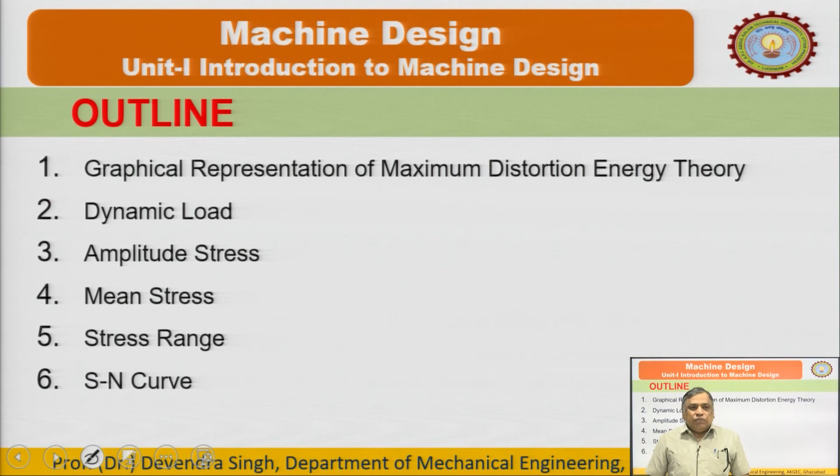Finally we will try to cover the determination of the endurance limit, because in static design we were considering the failure stress - for ductile material the yield point in tension, and for brittle material the ultimate tensile strength. Against dynamic load we consider a new strength called endurance limit or fatigue limit or fatigue strength. If these terms have additional meaning, we will discuss that when covering dynamic load design.

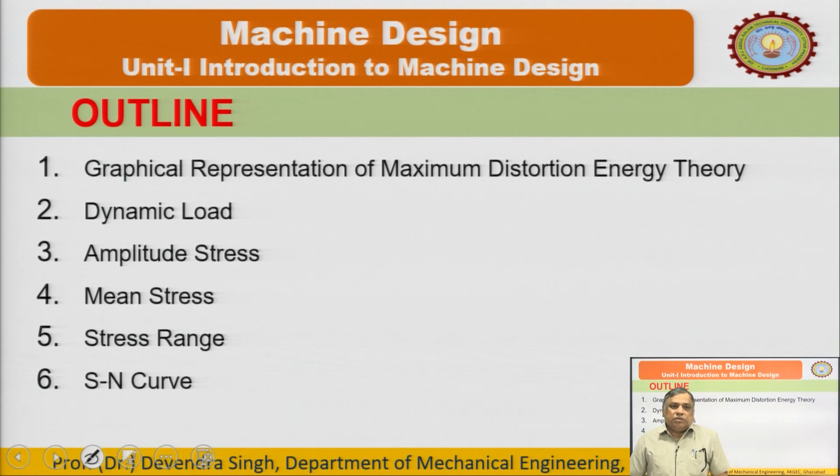So, the graphical representation of von Mises theory or the maximum distortion energy theory expression - this is the sigma 1 sigma 2 plane, O is the origin, and the expression for biaxial state of stress. This is the expression for factor of safety 1, and this is the equation of an ellipse.

So, to find where this ellipse intersects the sigma 1 axis and sigma 2 axis, we just put sigma 1 equals to 0 and sigma 2 equals to 0 in this equation. We can find out the points where it will intersect.

So if we want to find the points where this ellipse intersects the sigma 1 axis, we need to determine the coordinates of that point. So we just put the ordinate value 0, that is sigma 2 equals to 0, and find what sigma 1 is. Sigma 1 is equals to plus minus S_yt. As you put sigma 2 equals to 0, it becomes 0.

Sigma 2 equals to 0. Sigma 1 square should be less than or equal to S_yt square. So sigma 1 is plus minus S_yt. So the coordinates are S_yt and 0 - I haven't written the 0 here. So it intersects at S_yt, which is the yield point in tension.

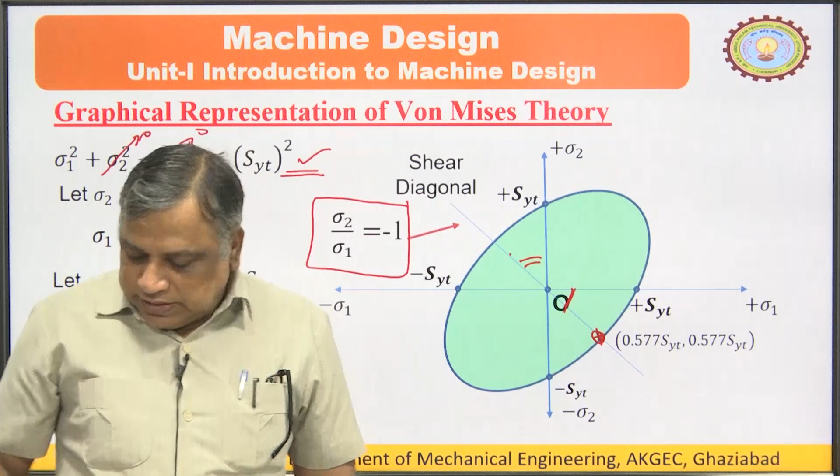This is the shear diagonal. So according to the maximum distortion theory, the shear stress at the yield point will be the maximum value, that is 0.577 times of SYT, and similarly we can determine it by the maximum shear stress theory. So this is the safe zone, and this was the yield point shear stress according to maximum distortion energy theory.

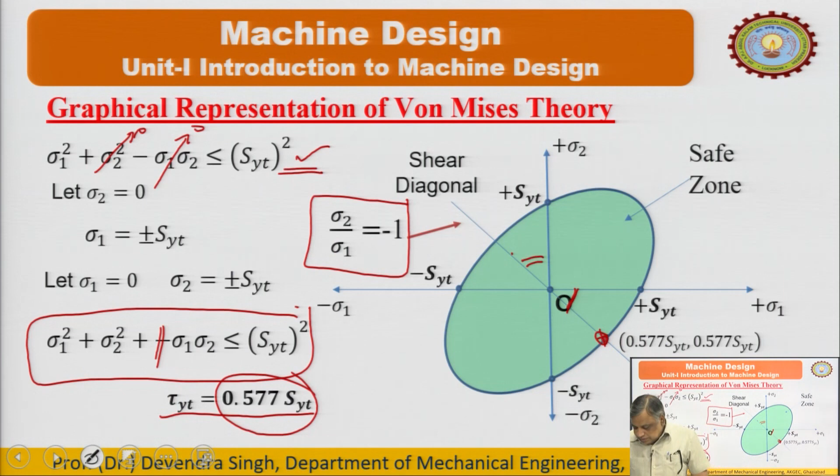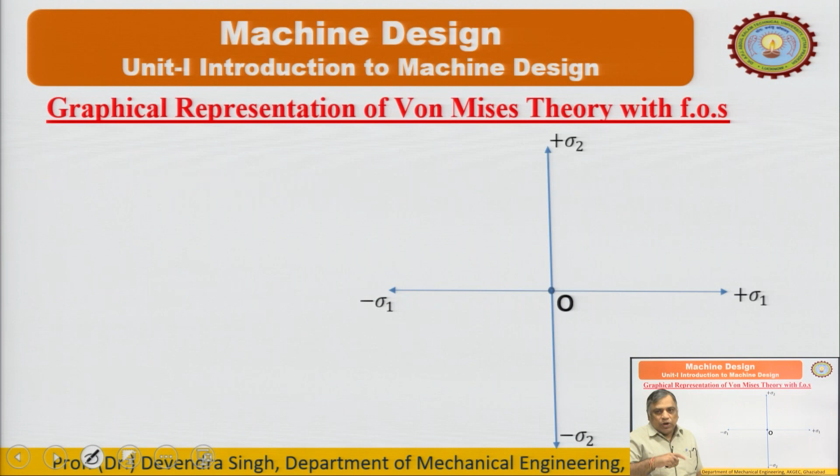Now, if we include some factor of safety, we will use SYT upon FOS on the right hand side, and the equation will change - this is the only change.

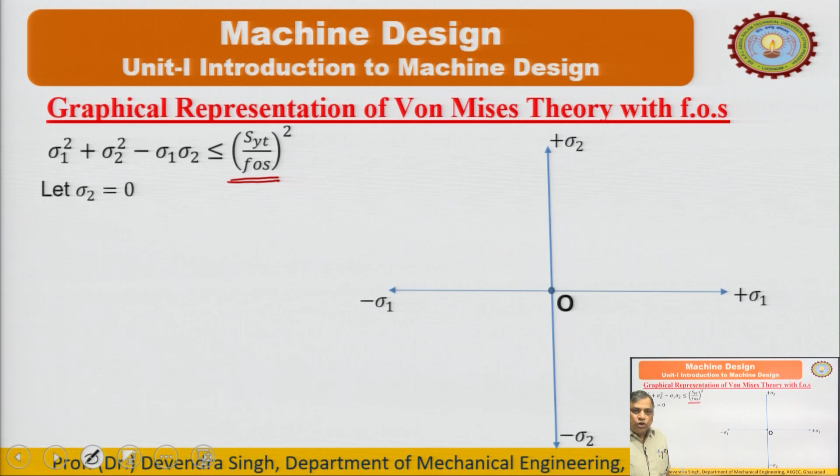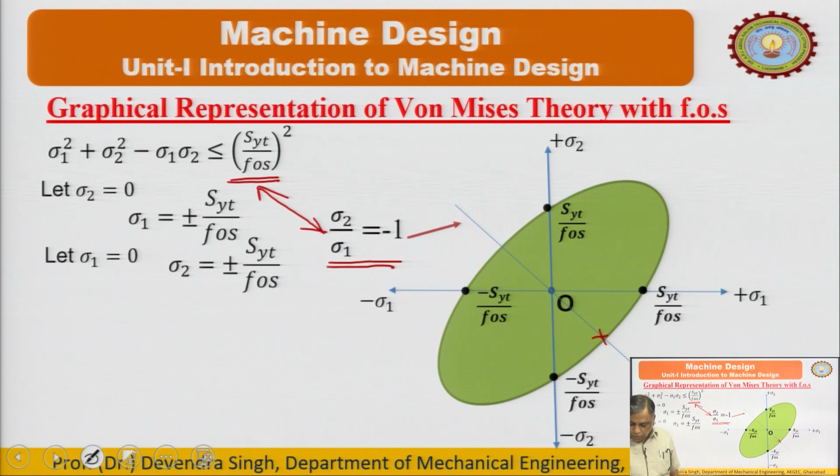Now again, sigma 1 and sigma 2 are the principal planes. This line represents the shear diagonal, and the equation of the shear diagonal is this. If we solve this and this, we get the value of this point. Now this point is 0.577 times of SYT upon FOS, because we have included factor of safety.

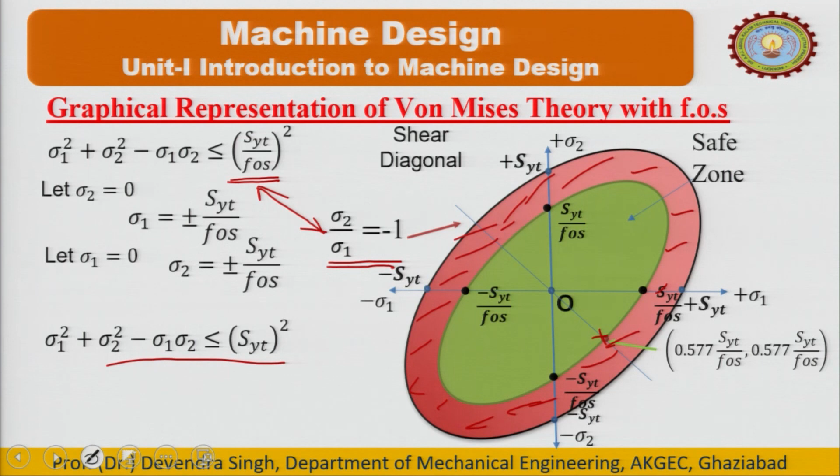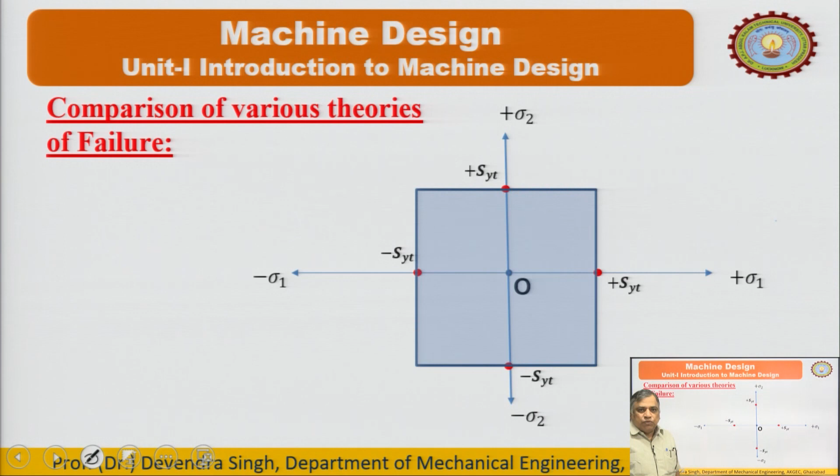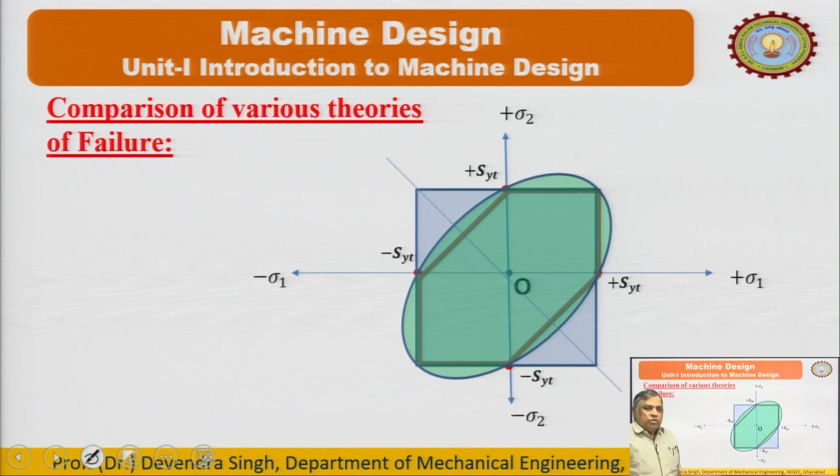This is the safe zone. Now, if we want to compare various theories of failure, again sigma 1 and sigma 2 are the two planes, these are the points SYT with factor of safety 1. This is the representation of maximum principal stress theory we discussed in the last lecture. Now this is our maximum shear stress theory, and this is our maximum distortion energy theory. So this is the shear diagonal. According to maximum principal stress theory, the shear tau yt equals SYT.

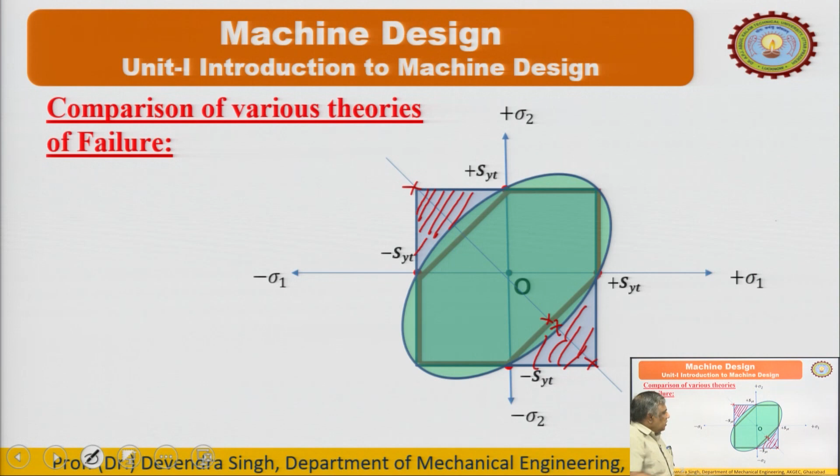This point is 57.7% of SYT, and this point is 50% of SYT. Here, if we consider the opposite nature of stresses, this is the unsafe zone according to maximum distortion energy theory and maximum shear stress theory. So maximum principal stress theory says this is a safer zone. So whenever material is subjected to opposite nature of stresses, we do not use maximum principal stress theory, even in the case of brittle materials.

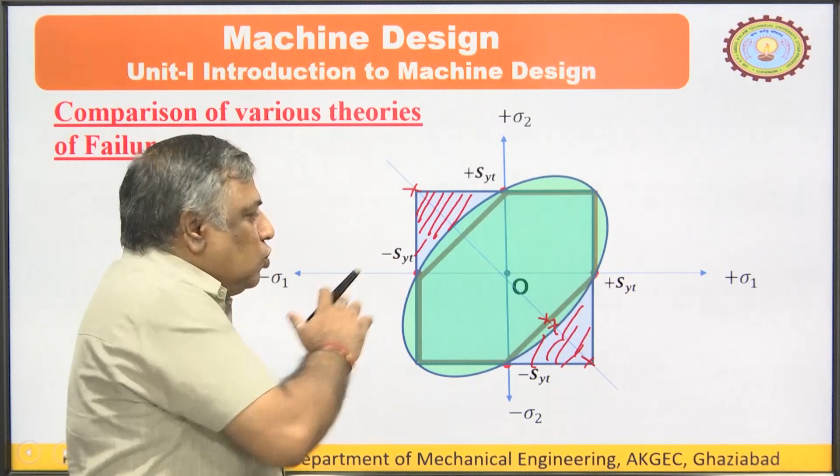Now, these are our ellipses for maximum distortion energy theory. So of the three, maximum shear stress theory is the most appropriate theory and will give the most conservative or safest design, and it gives the result directly. So we always use the maximum shear stress theory for the design of components made of ductile materials, and maximum principal stress theory for brittle materials, but we should always consider what type of stress the material is subjected to - it should not be opposite in nature. So this is all about the theories of failure.

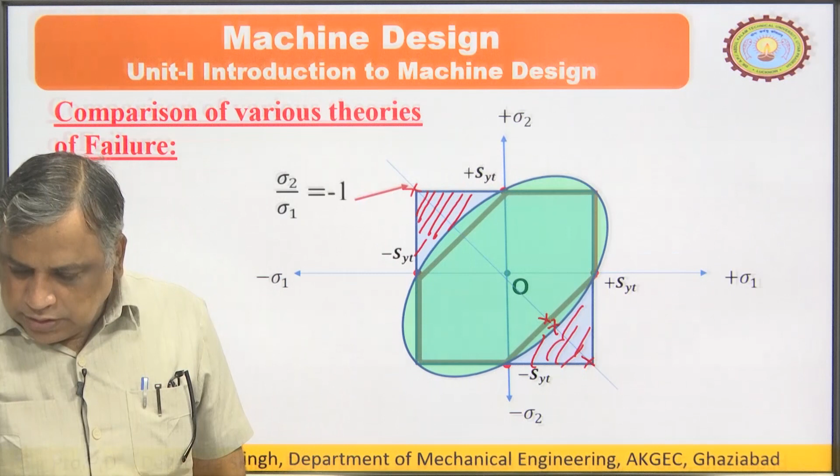That I have discussed. Now, design against static load is over, and the next topic we are going to start is design against dynamic load. So first, what is dynamic load? Load or force which either varies in magnitude or changes in direction with respect to time is called dynamic load. Here the magnitude is varying with respect to time, so this is a dynamic load. It may be like this - tensile, or negative.

So it may be like this, it may be like this. This is also a dynamic load. It is changing the magnitude as well as the direction or the nature. For some time it is tensile in nature, for some period it is compressive on the negative side, then again it will go to tensile. So this is a dynamic type of loading.

In mechanical engineering, most of the elements are moving, so the load actually comes on the mechanical components always of dynamic in nature. So we should learn the design concepts against dynamic load very seriously, and due to this dynamic load, what kind of stresses are induced in the material, for design purpose we will discuss.

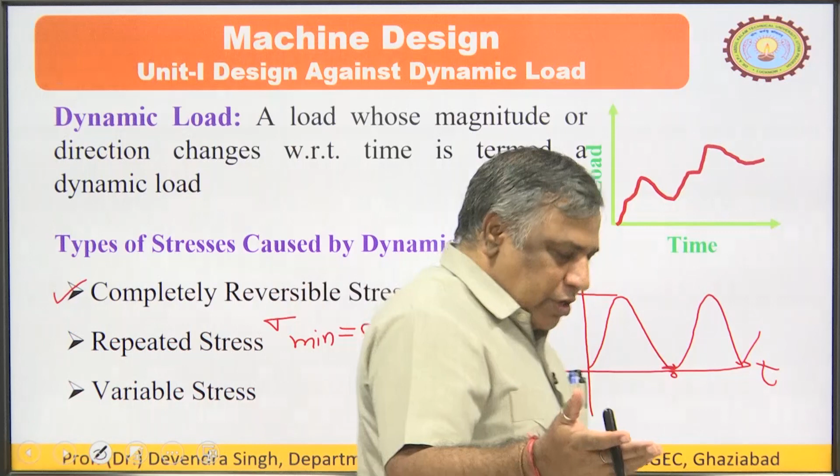And variable stress, it may have any kind of pattern, it may go to the negative side also. If I convert this, this is called the variable load. So if I talk about variable stress, to represent it we need...

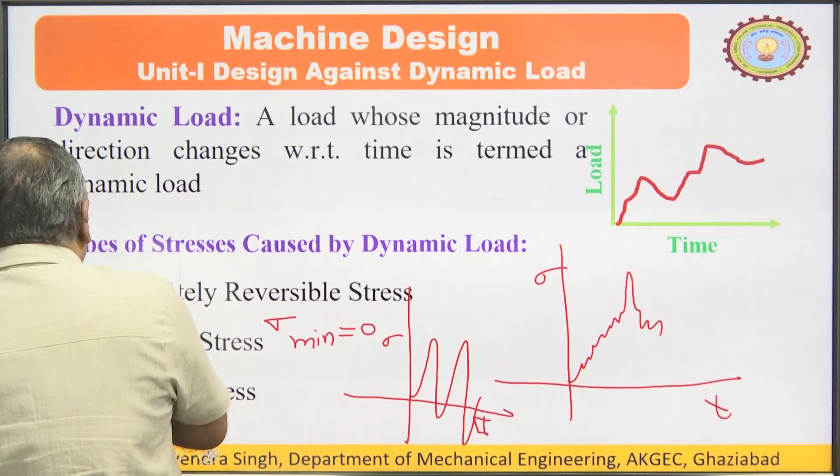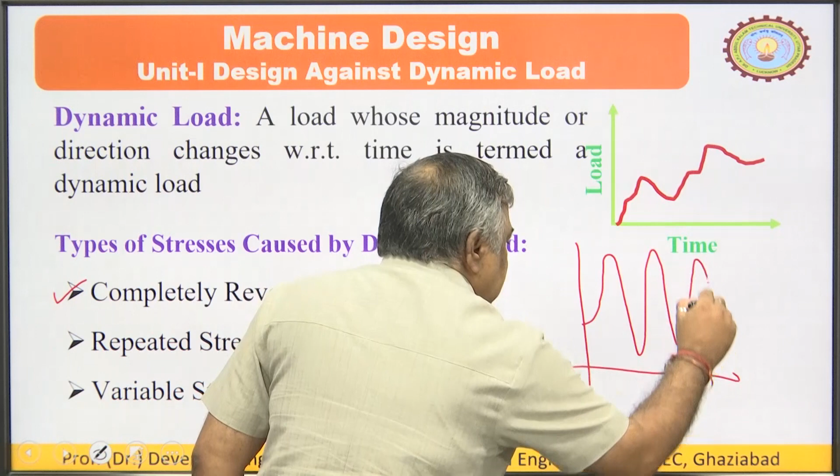Maybe some wrinkles - this is variable, this is sigma t. It may be like this, it may be like this, it may be having some value like this - it is not equal to 0. This is variable stress. So these are the three types.

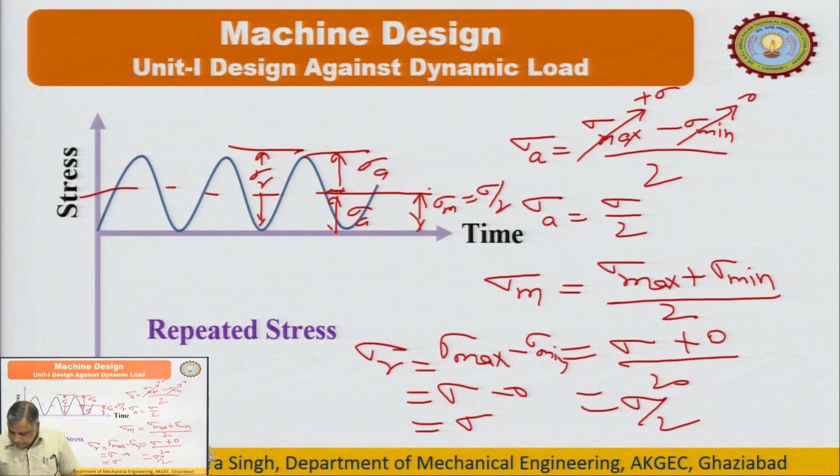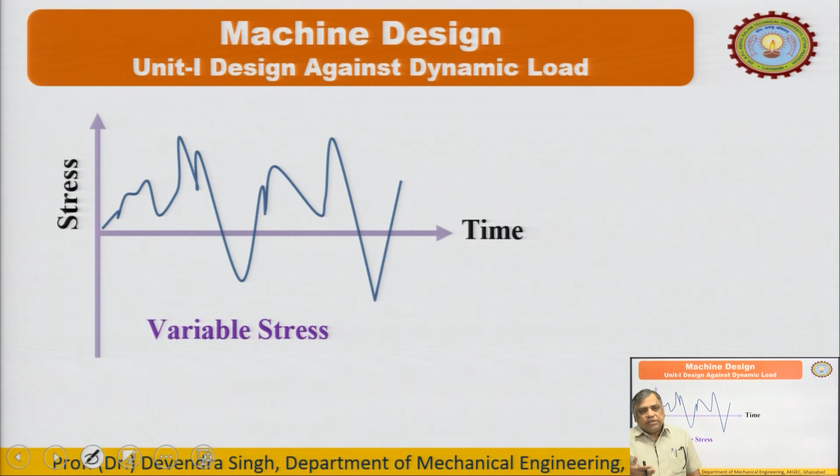So if any material is not able to take up load further, then the material is termed as under fatigue, and the fatigue failure is very interesting. Until now we used to understand that material fails after going beyond SYT and SUT, but in fatigue failure, if a material is working under completely reversible stress and if it fails, it may fail in 90% cases even below the yield point, and without any warning.

That kind of failure is called the fatigue failure. So when the material is subjected to fluctuating stresses or fatigue stress, keep this in mind, fatigue stress is completely reversible stress. In completely reversible stress, material fails below the ultimate point, and in more than 90% of cases below the yield point without any warning, this is called the fatigue failure.

Then the fatigue failure mechanism, if we discuss, I have written it already. So fatigue failure mechanism constitutes in two steps, it can be explained in two steps. First step is initiation of crack and then propagation of crack. Crack initiation and crack propagation will result in the reduction in the cross section or area, F upon A. If A is reduced, then the magnitude of stress increases without any warning.

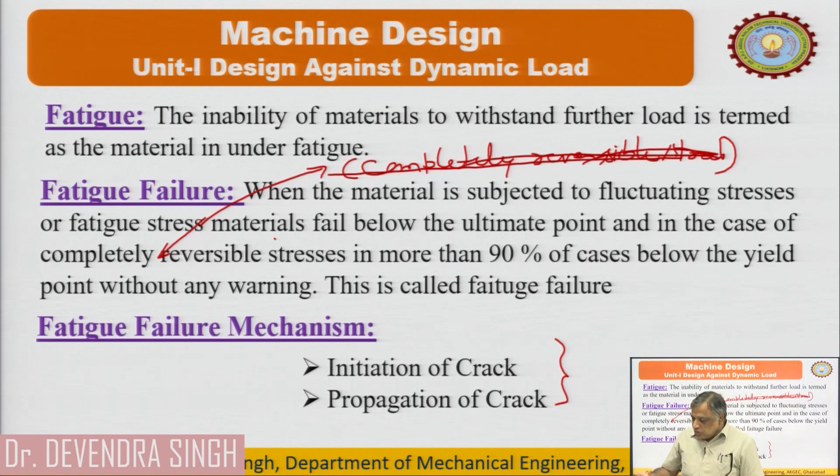So I will discuss the mechanism as well as the S-N diagram to determine the endurance limit in the next lecture. So for today.